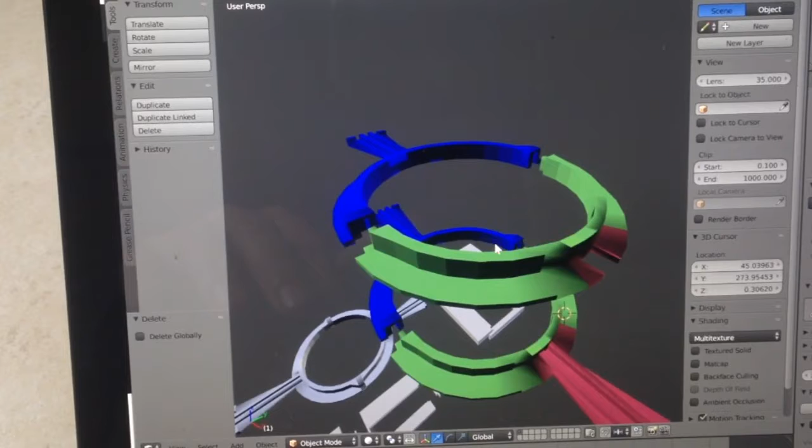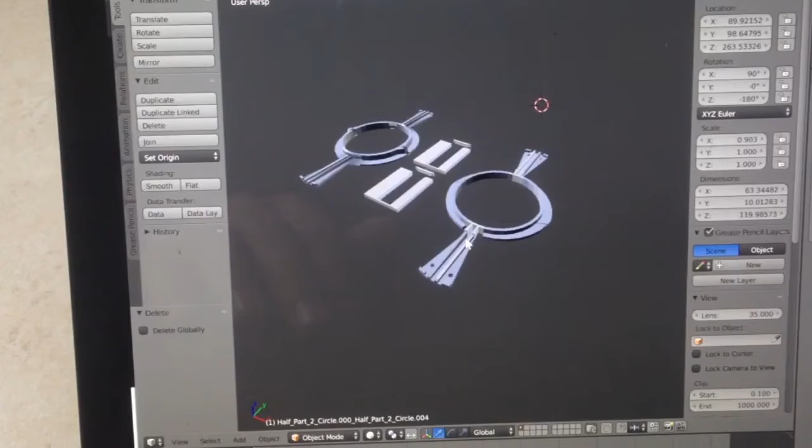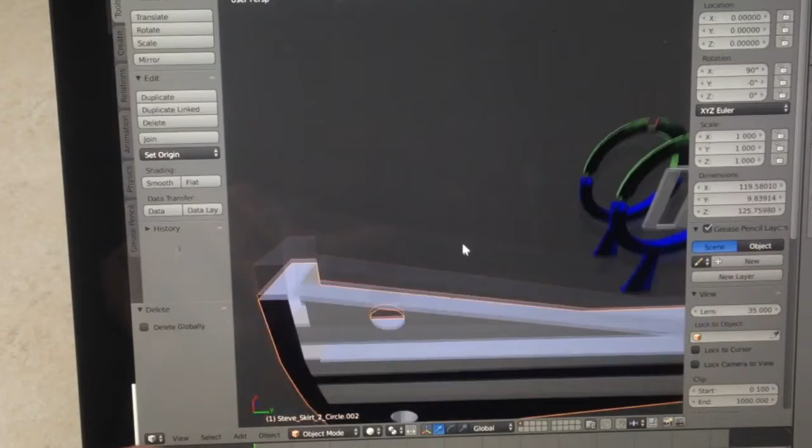Let's talk about what makes geometry such a pain in 3D printing. Take this geometry right here, let's zoom in so you guys can see. It looks fantastic on the outside, and you'd think it would print amazingly well. However, if you look at the bottom, you'll notice it's missing faces. When you're missing faces, that usually isn't good because it's what is called not watertight. Most of the time you can't tell this is happening.

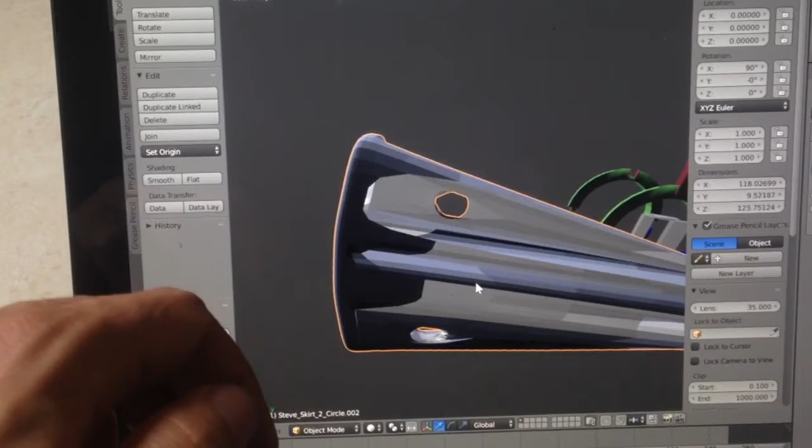So what you can do is press 3 on your keyboard. Now this is not actually smoothing the actual model. This is a fake representation of what it would look like if you were to add a modifier onto this thing.

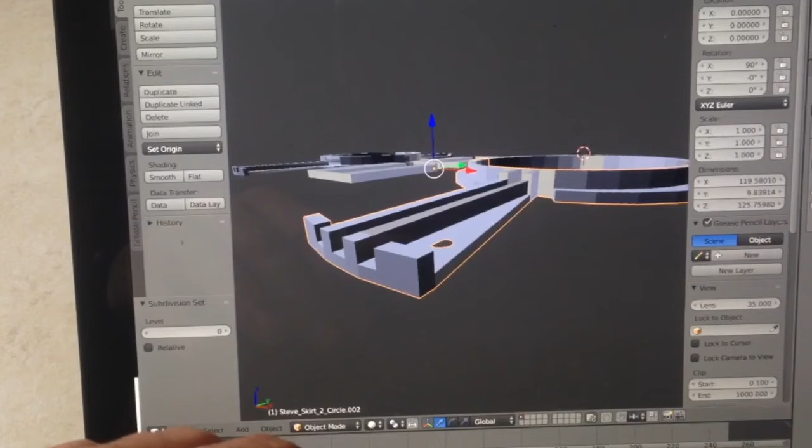And that, my friends, is when you click on the model, then go over here on the side. There's a thing called Add Modifier. If you were to actually smooth this, you'd have to go onto a subdivision surface.

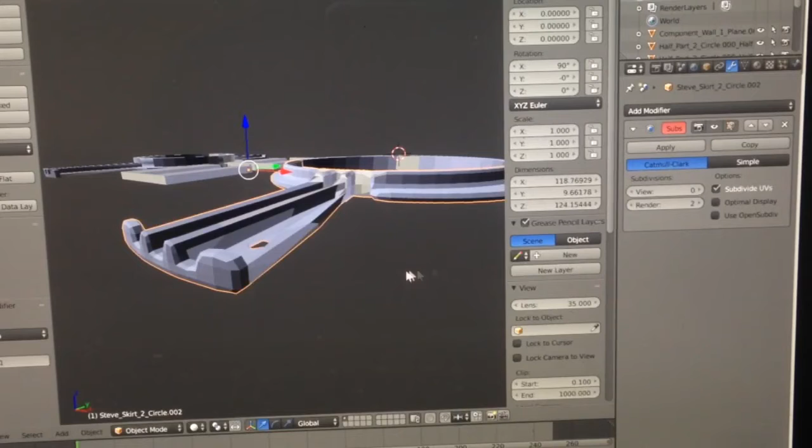This actually subdivides the surface, and once you press apply - let's see, I think it's this one, nope, this one - alright, now whether I press this button or not, you see it stays, and it has actually added layers to the mesh, as you can see in edit mode.

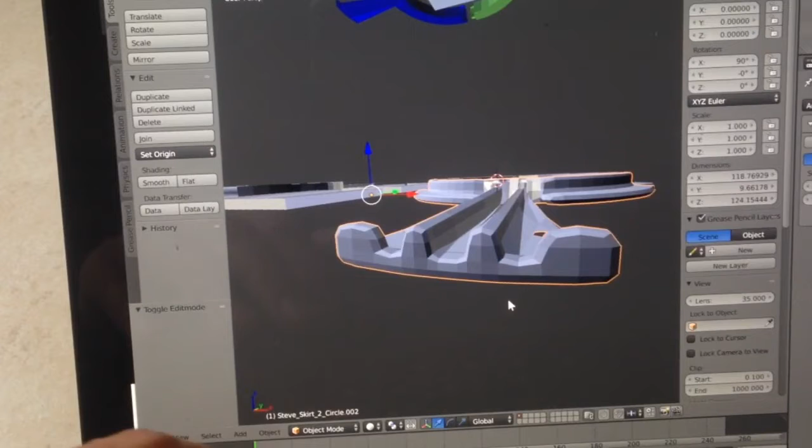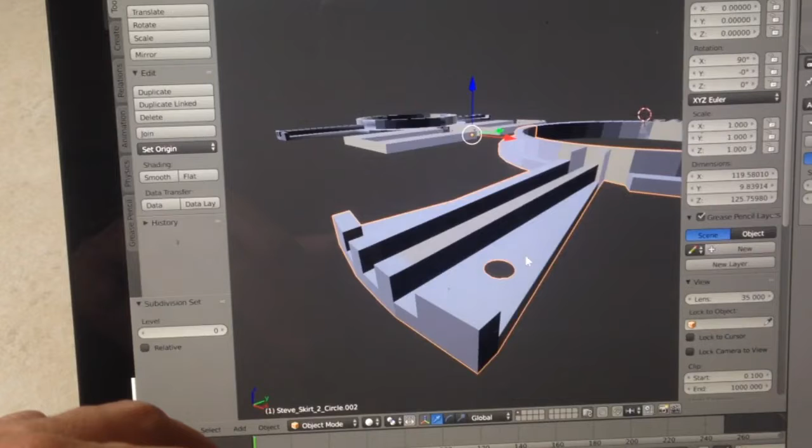On the other hand, if we go back onto object mode and press Control Z a few times... there we go. On the other hand, if you just press 3 on the keyboard, it does that, and then you press 1, it goes straight back because it has not added any actual geometry. It was just showing you what it would look like if you did add that modifier.

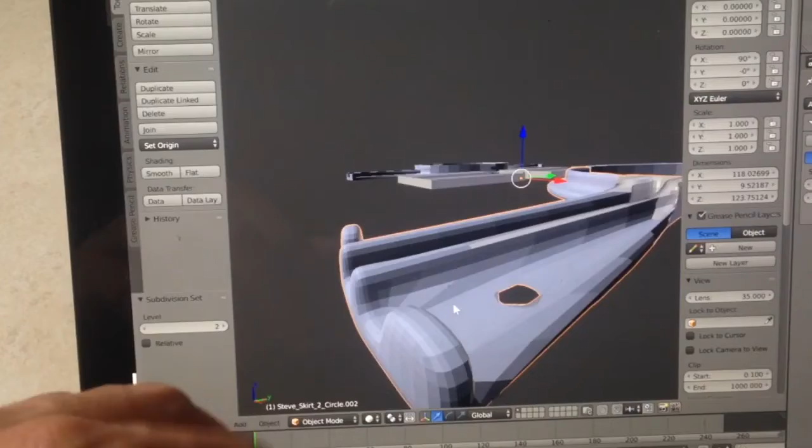Anyway, what that actually does when you have it in smooth is immediately show you where the broken parts of your model might be. It will also warn you if there are internal faces inside that were messed up. And what are internal faces? Very interesting stuff, isn't it?

No. I know I've bored you to death, Susan W. I know I have. I know you have.

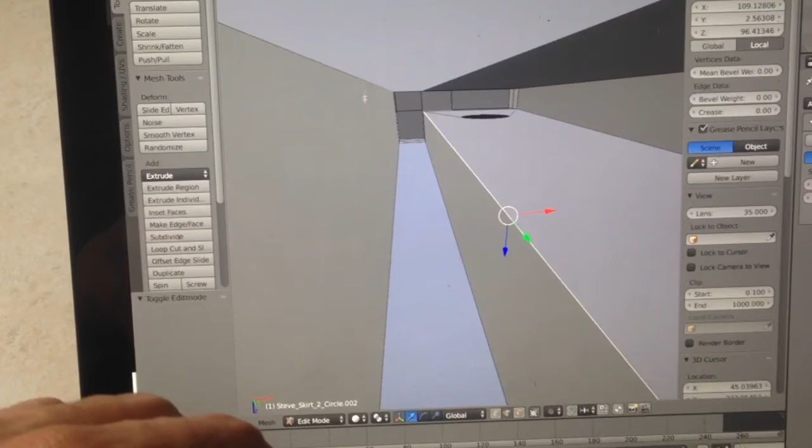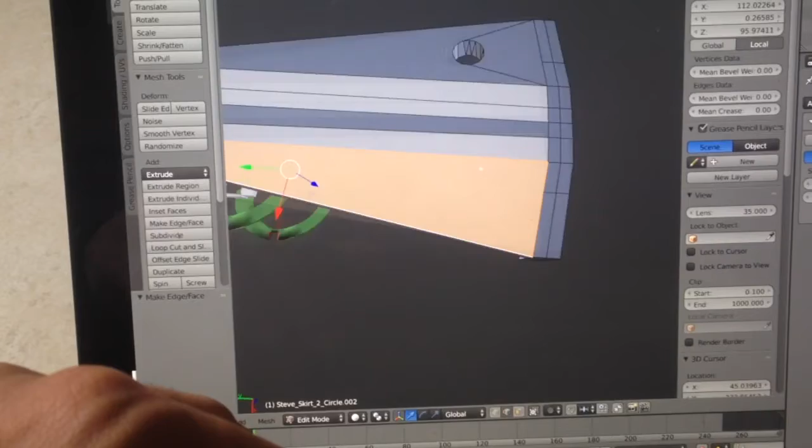Anyway, an internal face is, for instance, if you go to edge here and do an internal face. If I select an edge here and an edge here, and press Alt F, it will make an internal face. Although the internal face is on the inside and you won't see it - let's say I do this and this - now there is an internal face that from the outside you can't see, but if you go inside, ta-da, the internal face is still in there.

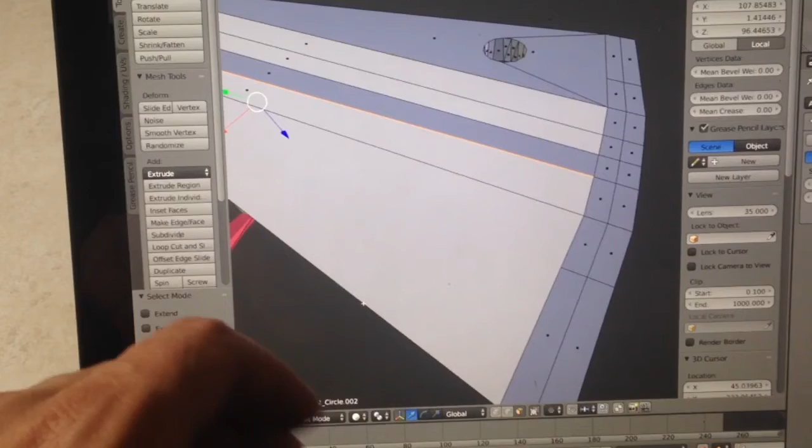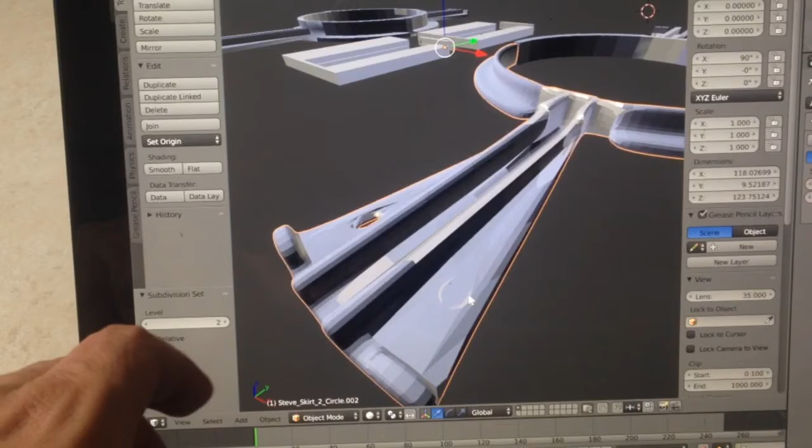Another way to do that is select the face here so you know there is a face in there. You can't see it from the outside, but it's in there. When you press on object mode and do this, that internal face could cause issues later on. This should give you a general idea of why it's useful to press the 2 key to see if your geometry is going to do some strange things or not.

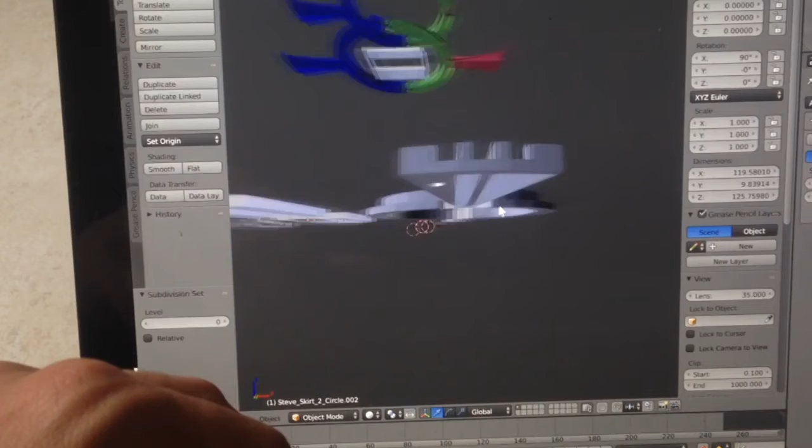Of course, whenever you 3D print stuff, you don't leave it in this option. You put it back, and then you export it into OBJ or STL for the 3D printer to read. Hopefully you guys get a good understanding of why the smooth view is useful when checking your geometry to see what's going on.

As you can see here, when I did that modification, there used to be a hole here that disappeared, because when you create things using booleans, like cuts, and then go in to fix the geometry, sometimes the hole, which is still technically there, disappears all of a sudden. We can go back here in edit mode and delete that face, and the hole is back.

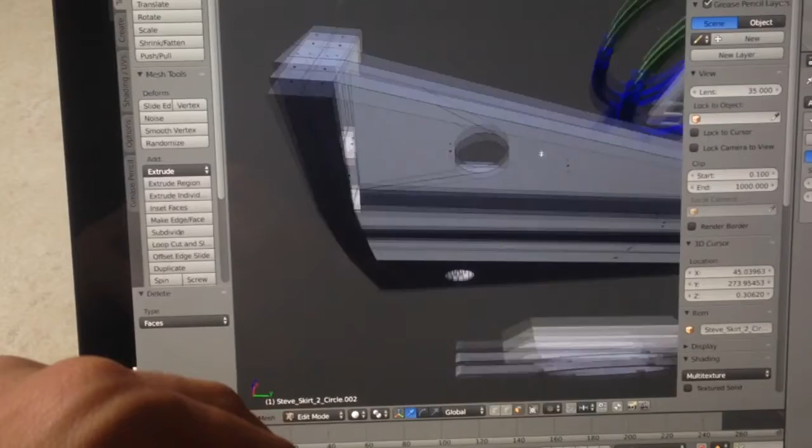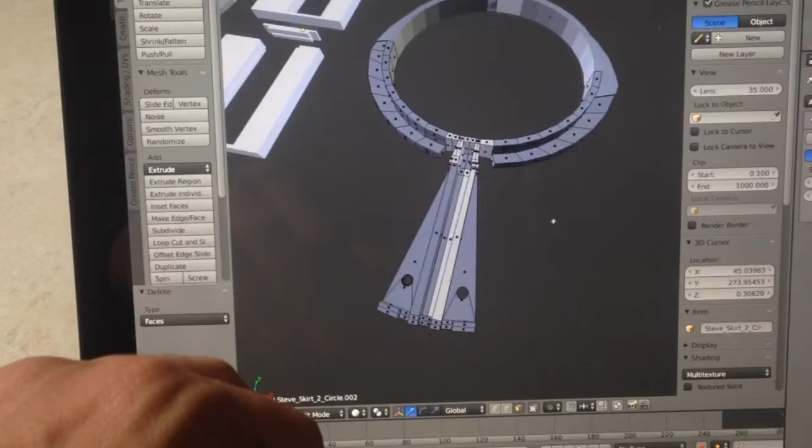Isn't that beautiful? But again, if you were to 3D print this part, because the face is missing, the hole would not print, and probably this whole part here would wig out, which is why most people just give up on 3D printing, because they either want to just print stuff that other people made, or when it comes to building their own models, they're just like, I can't, it's too much.

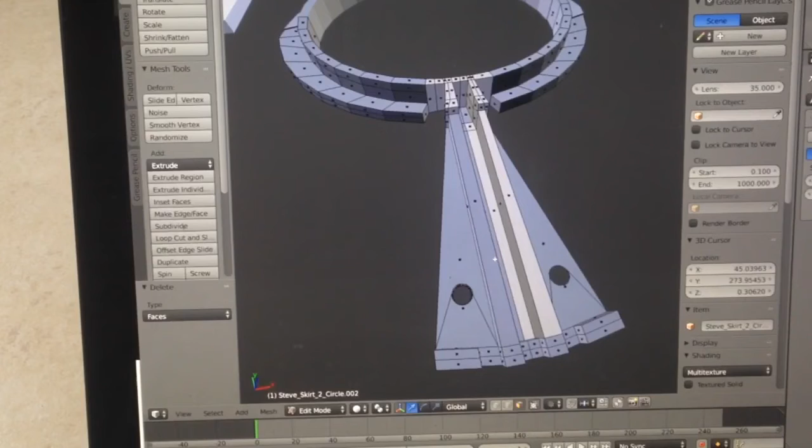So they go to other programs mostly, because building like this is very tedious. They may use something like Fusion 360, which is a pain because the license keeps running out all the time. Or they may use DesignSpark Mechanical, which is much better than Fusion 360. Or they may use Tinkercad, but Tinkercad is very limited and you can't do that much. That's why I prefer Blender.